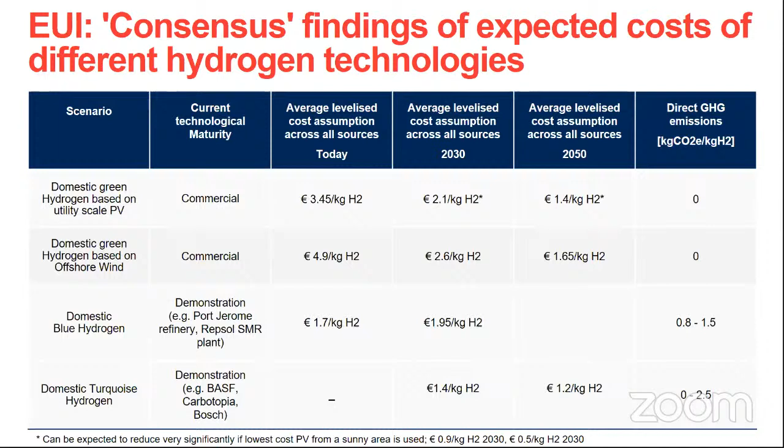Yes. Okay, fine. This comes from a study that the Florence School of Regulation did, Andris and I, with some researchers and Jean-Michel. And this gives the understanding of average levelised costs of where a consensus view of studies from the IEA, IRENA, Commission and other sources envisage that hydrogen prices will be in 2030 and 2050. The point to make here is the margins between the high and low estimates are enormous. There's a huge amount of uncertainty here.

But if one unpicks it in terms of green hydrogen, there's a vast range, if you dig behind this, of the potential cost of green hydrogen in the future. On the very low level, there's the idea that one can produce hydrogen from renewable electricity from PV in very sunny areas, which would bring down the cost of green very, very quickly.

But on the other hand, why are you going to sell your cheap green PV electricity to produce hydrogen if you can sell it into the electricity pool at a higher price? Secondly, there's the issue of water use in those areas. So there's some variabilities there. There's also the variability whether there will actually be physically enough renewable electricity to do the electrification and the hydrogen in due time.

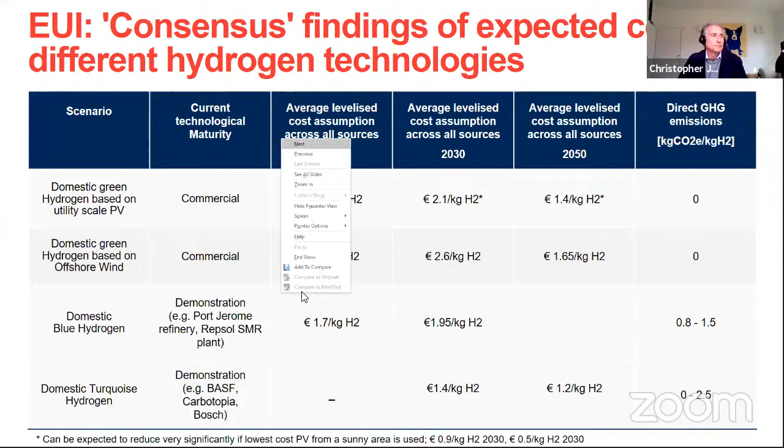So the other part of the study that we did was to try and examine, on the basis of these estimated hydrogen costs, or these consensus hydrogen costs, where the ETS prices might be needed in order to get low carbon or zero carbon hydrogen to replace existing hydrogen. So this is the feedstock hydrogen.

And you see the huge variations that you have here in terms of the potential ETS prices needed in order to substitute this carbon. So this is average renewable electricity using PV. This is the lowest cost. This is offshore wind, average and lowest. This is blue hydrogen, average and lowest, and this is turquoise, average and lowest.

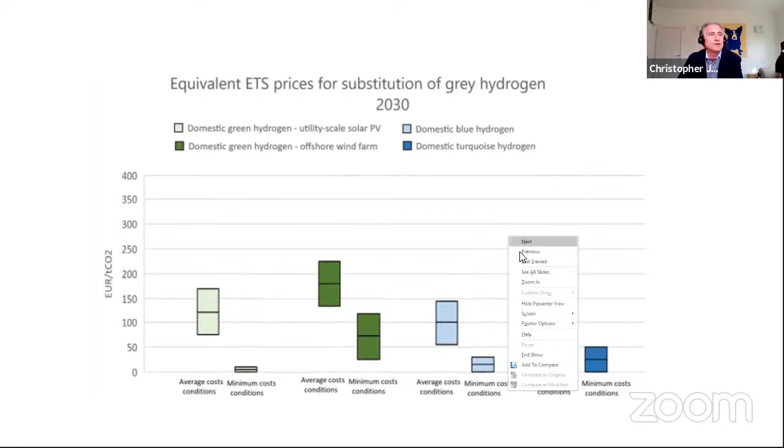So you see that some technologies for the 8 million tons of feedstock hydrogen that we're talking about are looking pretty good. So you can already start saying, okay, by 2030, that would kind of make sense. When you start, however, going to the high heat energy intensive industry, you start seeing very serious ETS prices that will be needed in order to get hydrogen used as an energy source. So there's also a great deal of uncertainty there.

There's also a great deal of uncertainty of how you make sure that green electricity really is green. Because if you put an electrolyzer in some parts of Germany, for example, and you buy electricity off the grid to power it and buy some green certificates, and the marginal producer in the area is coal, the only thing you're really doing is increasing the amount of coal generation on the grid. So is it really green in those circumstances?

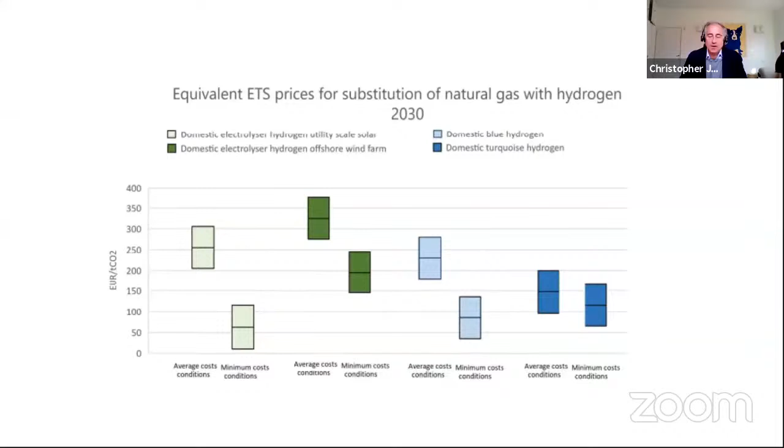So what conclusions do I draw from this? These are some of the issues that I'm sure our panelists will be looking at, because the point I'm making at the end of the day is we have to accept that to an appreciable extent, when the Commission does its legislative proposal, and as the member states design their hydrogen strategy, we're making policy in the dark to a significant extent, because there are so many unknowables. And this is not a criticism.

This is unavoidable. Because if any of us is going to say what the technology in relation to electrolyzers or pyrolysis, etc., is going to be in 2030, let alone 2050, well, good luck on that. There's an enormous number of not just technological variables but market variables, because the relative competitiveness of these different forms of hydrogen, and indeed hydrogen as an energy vector compared to renewable electricity, will depend on the ETS price, the renewable electricity price and its availability, the gas price, the hydrogen price, and also the extent to which the IPCC and the Paris Agreement is working internationally.

So this needs to be factored into the Commission's decision-making process. But on the other hand, we need to make sure that the market is ready by 2030, 2040, and 2050 at the right place. So just four little observations from my perspective in this respect.

The first is that, to the greatest extent, the successful internal energy market principles, which are based on allowing energy sources and vectors to compete with one another, should underpin the development of the future hydrogen market, because that is, at the end of the day, what energy sector integration is. It's a regulatory system which facilitates all energy sources and vectors to compete with each other on a level playing field for all energy demand, taking account of their relevant externalities, notably their greenhouse gas content.

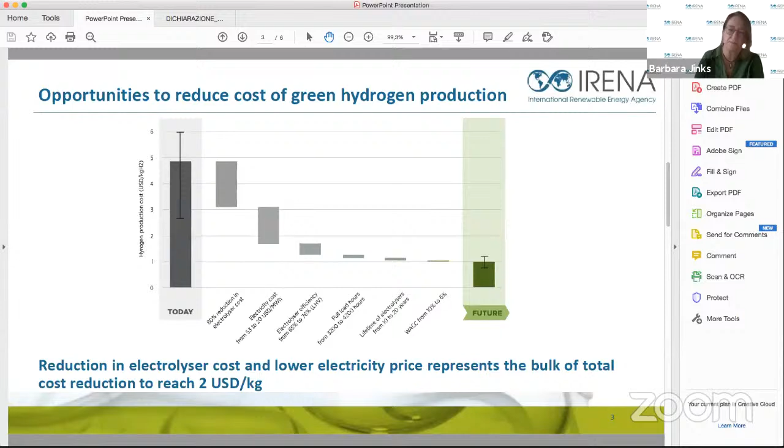And then the next bar is the electricity cost, which is as important, if not sometimes more important than the cost of the units. And then those are the major costs that can bring the cost of green hydrogen down to below $2 per kilogram. And then, of course, in the future, there's other cost reduction through efficiencies, longer lifetimes, and of course, the cost of borrowing, the cost of capital, that has an impact.

So the short-term cost reductions are more or less known, and that is reduced electricity costs, which is coming down all the time with the increase in renewable energy, and the 4 strategies that I've outlined with reducing the cost of the units itself. But of course, as Chris was saying, it's not known how fast these improvements will develop, and we can think about that, but we don't know until we start it.

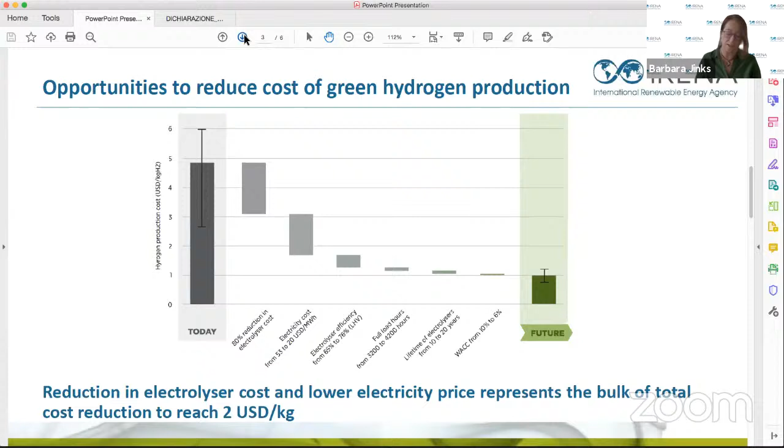Next slide, please. What does that mean for the final cost of green hydrogen? This chart shows the results of our research with some variables in the electrolyzer cost, in the cost of renewable electricity, and assumed efficiencies and lifetime of the plants. And you can see that the green line at the bottom, by 2030, in the optimum situations, green hydrogen can be reduced to the benchmark of $2 per kilo.

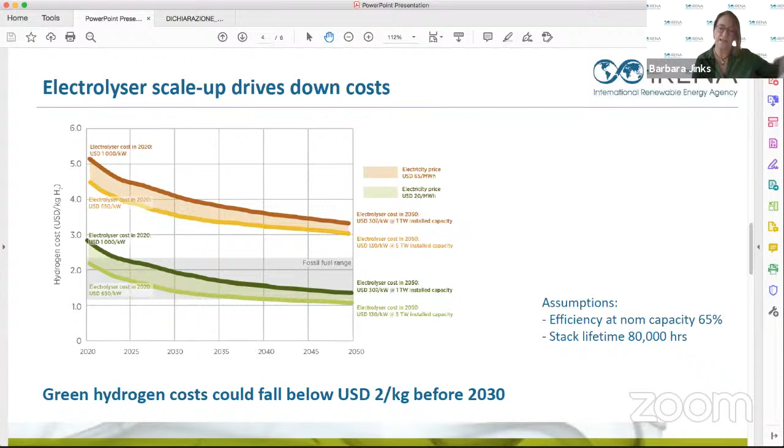And it's a more widespread reduction in the future. And of course, that depends on all the unknown variables that Chris was mentioning. But in the short term, we feel that with concerted effort and incentive and a willingness, the cost can come down. Next slide, please.

So in terms of policy, there are clear opportunities, and I think FSR, the team and the audience know very well what the opportunities are, that the key pillars for policymakers to drive down green hydrogen cost is to develop national hydrogen strategies. And by the end of 2019, there were 5 countries that had hydrogen strategies. And by the end of last year, there are 20. So we can see that that is taking place, and it's a positive sign.

But then policymakers need to understand what the key targets for green hydrogen are and set priorities or targets. And IRENA supports the use of green hydrogen for the hard-to-abate sectors of aviation, heavy transport, heavy industry. And the policymakers can also provide certification and the guarantees of origin to allow consumers to be confident of what they're buying and what the carbon content of the fuels are, and to allow the market to be able to develop with certainty.

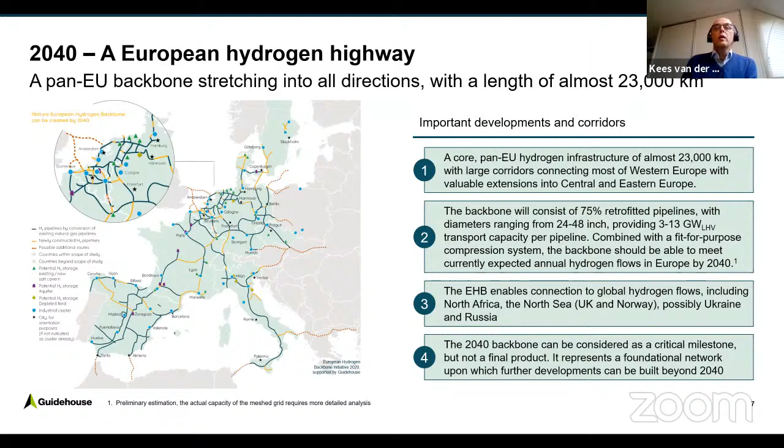So if I go to my second slide, that's a little bit about optimization. If you look at how to dimension such a network, you look at the pipeline parameters, the given ones of the existing pipelines, and the ones of new pipelines where you have more freedom of choice. You look at compressors, that's really a big difference. So speaking about technology, the compressors needed for hydrogen transport are bigger and more complicated than for natural gas transport. A lot of work to be done there.

You look at pressure requirements, also at the delivery point, what pressure is needed at the end of the pipeline, what can be supplied at the beginning. And you look at all kinds of CAPEX and OPEX trade-offs. And there we found that in the end, it's probably, as I already said, better not to maximize the hydrogen flow, because that would lead to disproportionately high compressor capacities needed and electricity to run the pipelines. What we find is that if you go a little bit lower and take like the 13 gigawatt capacity for a 48-inch pipeline, then you only need like 2% of the energy content of the hydrogen flowing through the pipeline to transport it over 1,000 kilometers.

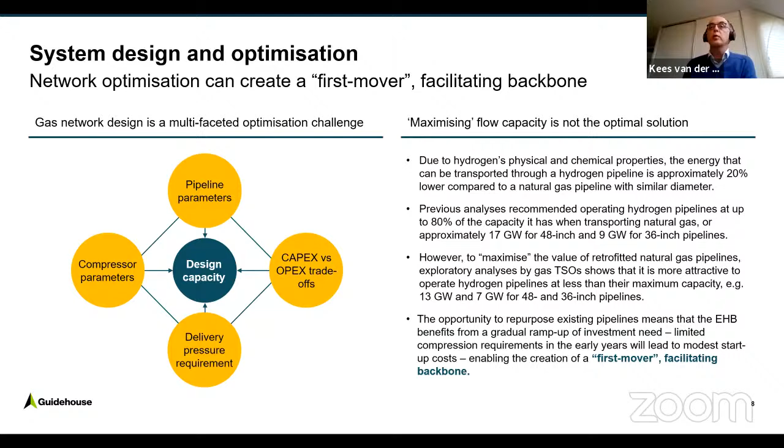We have also tried to come up with cost estimates for such an infrastructure. Of course, it's a wide range because there's quite some uncertainties, especially on the compressor side, even considering locations and the electrical connections needed at the location. But roughly the investment cost of such an infrastructure that I showed for 2040 would be 30 to 60 billion. And if you take into account the cost of compression as well, the OPEX, the operational cost, then that translates to transportation cost of around 9 to 17 euro cents for a kilo of hydrogen over 1,000 kilometers, of which Barbara showed the production costs.

So if you're talking about $2 per kilo hydrogen, let's say €1.60, €1.70, then for less than 10% of the production cost, you can transport it over 1,000 kilometers. So you have a much bigger addressable market for supply projects and a much bigger area from which to source your hydrogen if you're, for example, a steel company needing it for your decarbonization.

So that's for now what I would like to add to the discussion. This is kind of an offer by the gas infrastructure companies to the European hydrogen economy. And of course, yes, they want to reuse their infrastructure, but that's no different than electricity transmission companies now offering to carry renewable electricity from A to B, where in the past they used it to transport fossil electricity from C to D, right? So it's a piece of the puzzle, and what we're doing at present in phase 2 work is talk to many stakeholders on the supply and demand side, but also market operators, equipment suppliers, etc., DSOs, distribution companies, to see what such a backbone could mean to them.

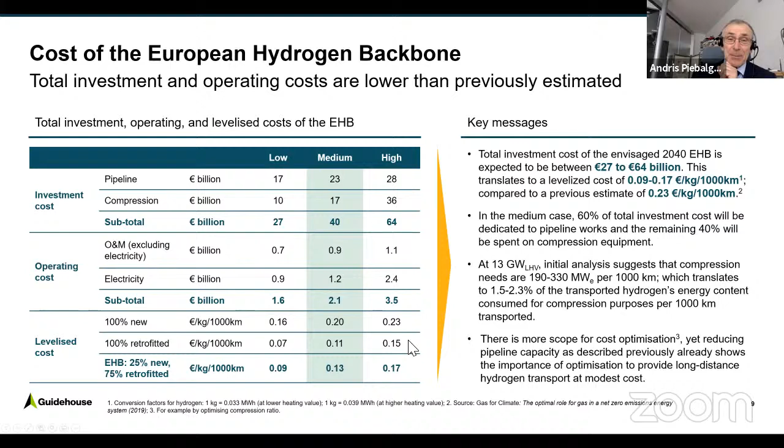I have a question from the audience. The audience member asking is Michael Jensterle. He asks, or he or she, it could be, did I understand correctly that existing pipelines are suitable for carrying 100% hydrogen? And there's a sub-question, with adaptation or without?

If I could add one note also for the hydrogen backbone. At some stage I heard from European schools that for most students at the school, Europe ends more or less with Berlin. Whatever happens else is just one big spot. And I think with this map, you immediately broke that.

I understand the answer, but there should be something, because the perception is that it is only for a couple of countries involved and some countries are not involved. I know it's work in progress, but it would be nice that you somehow find a way to adapt it, because I know that Portugal is also isolated, but this is something that could lead to some misunderstandings later on. But the question from Micha, please, Kees.

Thank you for two very important questions. First, on the suitability, it's not a law of nature that natural gas pipelines are suitable. It depends on the steel that has been used to produce them. But with all the participating TSOs, we found that their transport pipelines are suitable for 100% hydrogen transport. And that's what we're talking about here. We're not talking about blends in this backbone project, although that's also a possibility.

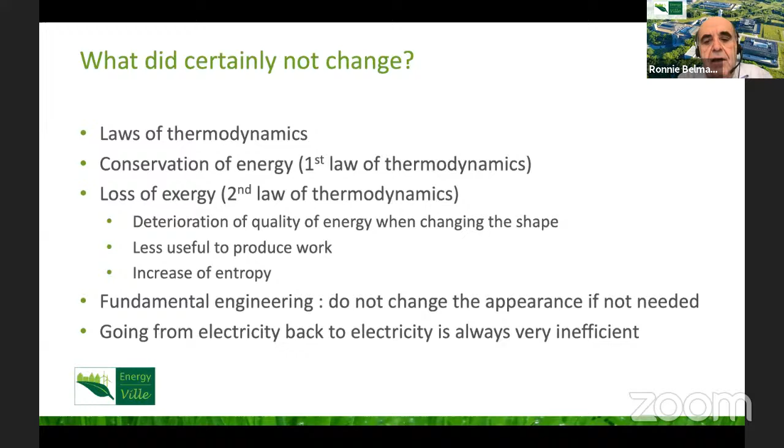What also changed in 2020, and one of the things that amazed and surprised me when reading it, is that Communication 299, 'Powering a Climate Neutral Economy and an EU Strategy for Energy System Integration', really writes down in legal terms the physical law I just explained. First, reduce energy demand — energy efficiency first.

Then electrify whatever can be done electrically. So if you have electricity from PV or wind and can use it electrically, don't do anything else with it. And if steps one and two don't work, promote renewable and low carbon fuels, including hydrogen, in hard to decarbonize sectors. They enumerate a number of those fuels. I was surprised and very happy to read that, because it fits with my way of thinking.

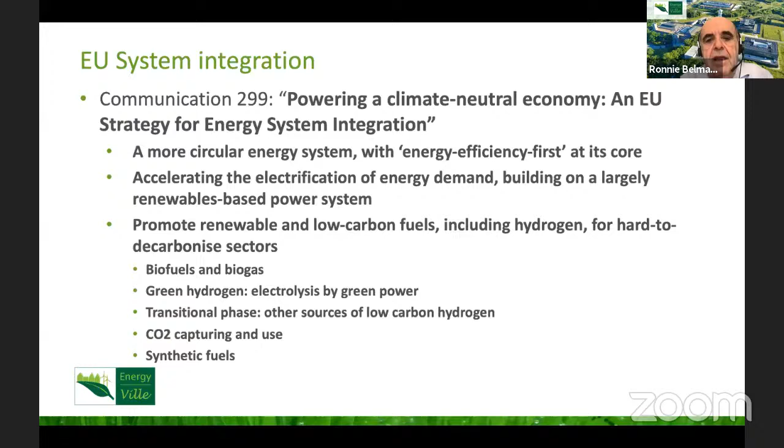What are those hard to abate applications? They always enumerate: industrial processes, transport modes such as aviation and maritime. There are also potential applications listed, like captive fleets of buses, heavy road transport, etc., and industrial applications like steel refining, etc.

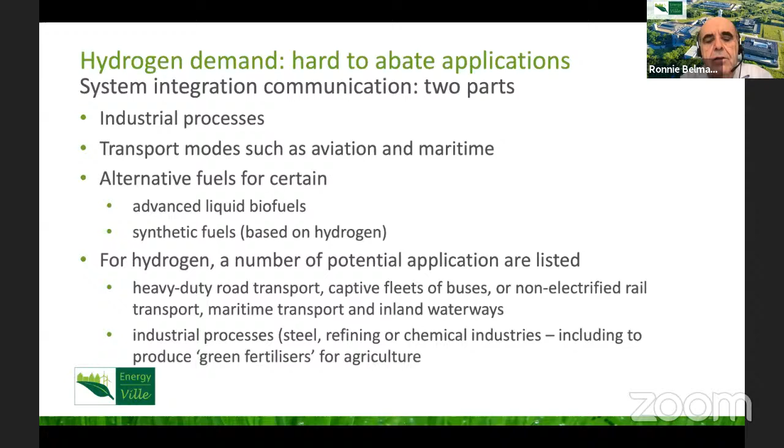Now, to get a sense of the scale, we did a very rough, high-level study on energy demand as it is now. First of all, you have hydrogen, roughly 10 million tons now in the EU, and that has to be supplied.

Be careful, this isn't certain, because if we're going to a fully decarbonized system by 2050 — and you see here that 25% of present hydrogen demand goes to refineries — what will refinery demand be by 2050? If we all drive either electrically, which I think, or with carbon neutral fuels, will there be any refineries left? We have to be careful not to assume things stay the same across all energy supplies.

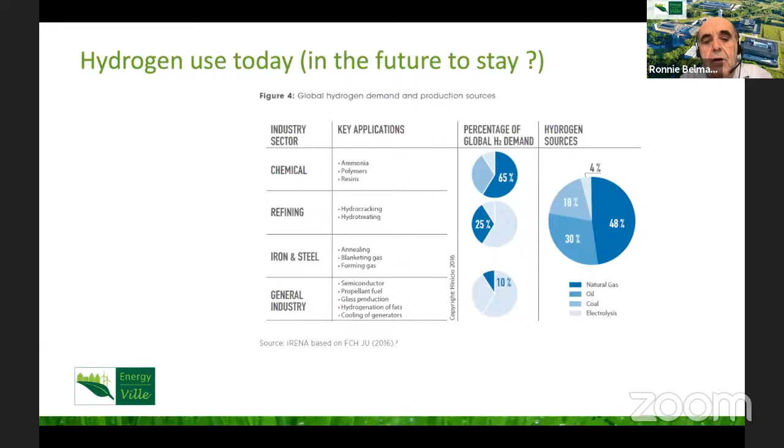But if we look at transport, here are enumerated the different approaches and transport needs, starting from what type of transport is required. Coming to cars, land transport, e-bikes — you see that all European car manufacturers are going electric, period.

There are no hydrogen cars available except in South Korea and Japan. Toyota is still working on it, Hyundai is still working on it. But in general, in all the paperwork, they're not counted anymore among the hard-to-abate applications. So let's forget about cars, certainly in the long run.

There are many battery manufacturing investments going on in Europe, in the Nordics, and also Tesla near Berlin. We see electric trucks taking off, with Volvo, Tesla, and others.

Just to give an impression, present energy use for land transport is roughly 3,335 terawatt hours. If you electrify this, you end up with an electricity demand of 1,100 terawatt hours. So yes, we can imagine electrifying that 3,335 terawatt hours, but it would put a burden on the electricity system of 1,100 terawatt hours. To give an idea, Eurostat shows EU-27 requires 2,500 terawatt hours now — so this would be a serious burden.

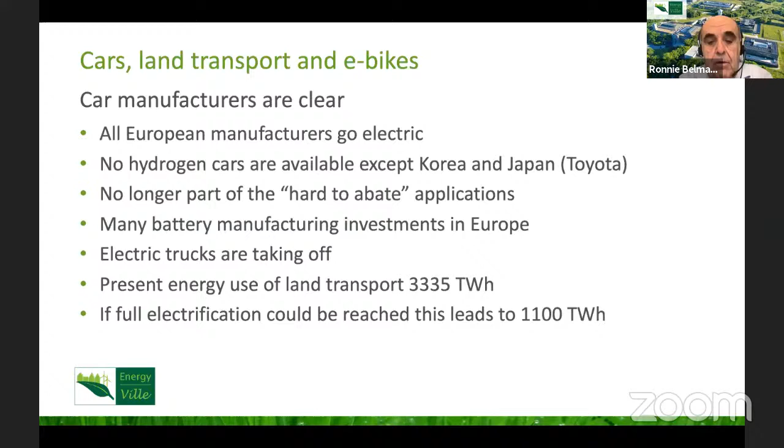What is certainly to be abated by fuels, as we know now, technology-wise? Shipping and aviation. There is no real technology pointing to long-distance shipping and aviation being electrified in the decades to come. Maybe I'm wrong, maybe there's a big breakthrough, but I can't find it. If you look at the Eurostat statistics, the fuels for shipping and aviation are difficult to find because they are not in the regular fuels category. But if you puzzle a bit, you get to roughly 1,053 terawatt hours of liquid fuel being used for shipping and aviation in Europe, bunker fuels, etc.

These have to be substituted by synthetic fuels, by hydrogen-based fuels, which have to be produced.

If you look at buildings, and I know what Christopher said about the inertia being there, and I fully appreciate that. But technology-wise, is it possible? If you do the analysis, you get in residential buildings a demand of 2,851 terawatt hours. A lot of it is biomass, also heat networks, also electricity demand. And there is 1,245 terawatt hours going into residential buildings from natural gas and petroleum. If the renovation wave would be successful, there would be 75% less demand on that, leading to 300 terawatt hours of heat to be supplied to residential buildings. These are rough numbers—you'd need more careful modeling, but to give you an order of magnitude, you need roughly 110 terawatt hours of electricity.

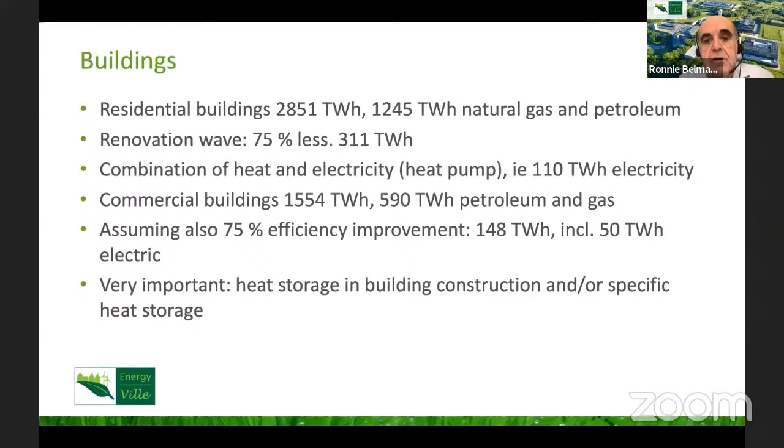For commercial buildings, you can do the same exercise and you come to 50 terawatt hours of electricity. So if you go fully in the direction of heat pumps and supply of the remainder heat from the ground or from a carbon-free heat network, you come to an extra demand of electricity of 160 terawatt hours, roughly. This is feasible, but as Christopher said, it will take policy, a lot of pushing, and good design of buildings, because heat storage is important and the building design has to really be in accordance with that heat storage, which is not easy and will cost a lot of architectural thinking.

In industry, the overall demand of energy is 2,860 terawatt hours. Together with Piero Dos Reis from FSR and other people, including JRC, we've been looking at the Eurostat statistics. If you look at those statistics, they are very difficult to interpret. Sometimes they include process energy and process fuels, part of it being feedstock. But how, if you want to include, for instance, electricity going to hydrogen and used again for electricity—those things are not included. So these statistics in Eurostat have to be modernized to account for these renewable surroundings with feedbacks from electricity to sustainable fuels and back. There has to be a very careful analysis on that.

So industry has two groups: some are centrally located and some are more distributed. For the centrally located, you can think of producing hydrogen or synthetic fuels on the spot, and the production of those synthetic fuels can also be either centrally produced or imported from other countries. Just for completeness, here's the list of industries in Eurostat. You see that iron and steel and chemical and petrochemical already cover an awful lot. Also very important is non-metallic minerals—read, cement industry.

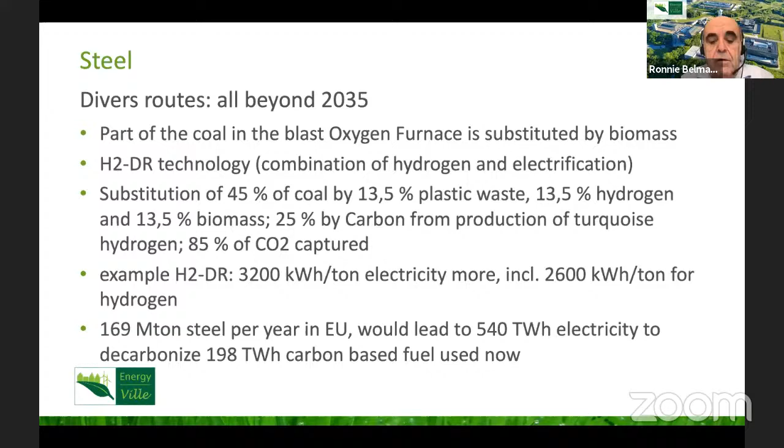If we go in that direction, the numbers say you need roughly 3,200 kilowatt hours per ton of electricity more, which includes 2,600 kilowatt hours per ton for the production of hydrogen. Now if you do a ballpark calculation, with 169 megatons of steel per year in Europe, it would lead to 540 terawatt hours of electricity in order to decarbonize roughly 200 terawatt hours of carbon-based fuels used today. To give you an example, of the 2,500 terawatt hours of electricity used in Europe today, making steel carbon neutral would add up to only 500 terawatt hours—and that includes a large chunk of hydrogen.

This process is technically very interesting, but poses a lot of energy challenges. If you go for petrochemical, as I said already, the hydrogen demand will drop in refineries. And if you go to the chemical industry, there are a lot of routes. When discussing hydrogen—or I'd rather say carbon-neutral fuels—you have bio-based chemistry, a lot of circularity possible in plastics, electricity-based hydrogen for ammonia production, and other electricity-based hydrogen production. You also have CCUS, being blue or turquoise. Just to give you an idea, at this moment 262 terawatt hours is already used in the chemical industry.

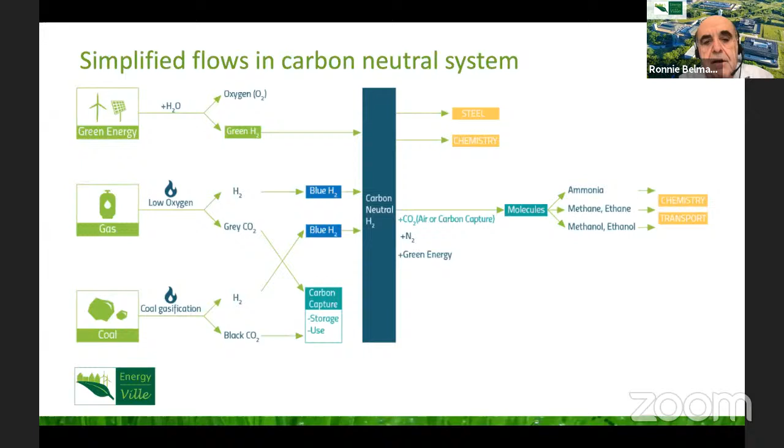Only for ammonia, it would require 161 terawatt hours of electric energy to decarbonize the whole ammonia cycle. That's still under a lot of debate. What will be imported as molecules, produced close to Europe, or produced close to demand? A lot of things still have to be done. I was very intrigued by the numbers Kees showed on the flows into hydrogen pipelines. We really have to look at how much the different parallel flows can be in power. It's going to be a very interesting scientific debate. But as a conclusion, there is a lot of work to be done to produce hydrogen and synthetic fuels, which are unavoidable for the time being.

A lot of it will be in transport, aviation certainly, shipping certainly. Road transport, as I said, we'll see. Buildings can be done, but we have inertia there. In industry, you have different approaches. But what's very important is that there are big reports on it, and if you read all those reports, all of industry decarbonization seems to have the same magic number: things will start to take off by 2035. So let's start working on what we have to do, but we really have to look back to square one of communication 299: do whatever you can in electrification first, and prepare for 2030 plus for synthetic fuels.